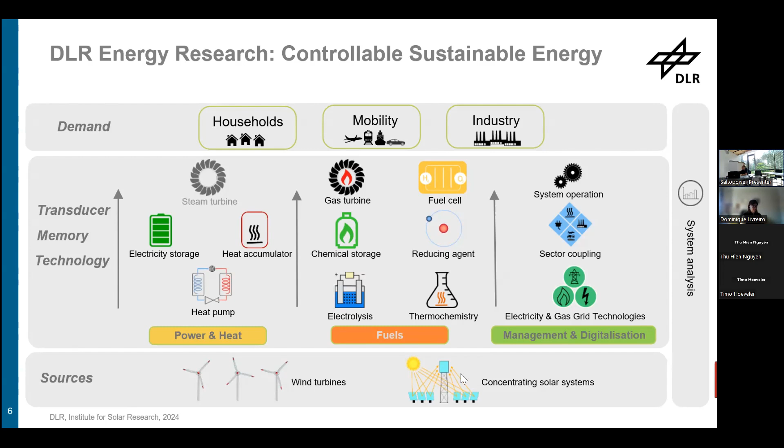Thanks, Dominique. To the demand side, to the use. DLR is working in different institutes on this, and the slides are flipping forward and back.

And the main source, in particular in our institute, Institute of Solar Research, is the sun as energy source. It is the main energy source for the world, even compared to all the other fossil energy sources, and it is one of the cleanest energy sources in the world.

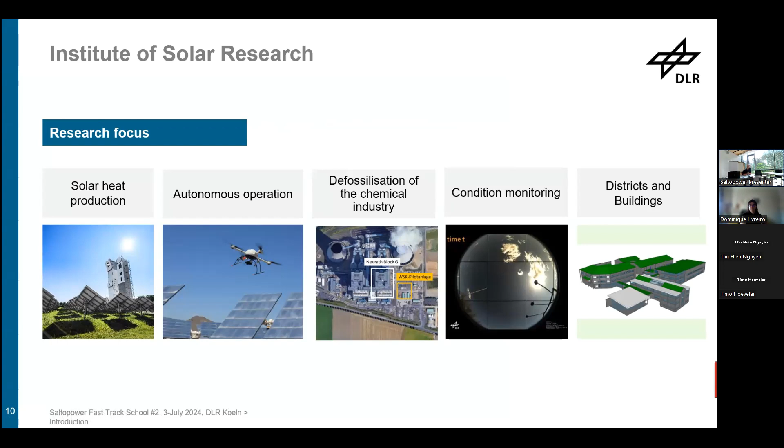I showed this video already in a loop before, so I won't show it again right now. In the Institute of Solar Research, the focus is on solar heat production, on operation, on defossilization of the chemical industry, condition monitoring, and also a group working on districts and buildings.

Although the technology at DLR has been worked on for more than 40 years, the origins go back to the 70s, for the first oil crisis. A specific Institute of Solar Research has been founded in its current form in 2011, with the directors Robert Pitz-Paal and Bernhard Hoffschmidt, you know them.

And we have additional facilities, including the solar tower in Jülich, the large Synlight solar simulator. In 2020, the spin-off of the Institute of Future Fuels, dealing with all the solar chemistry, fuels, and hydrogen. A second tower in Jülich for the many tests we are performing, and a new department, Sustainable System Engineering, with Jana Stengler heading the department.

We are in 5 locations: Cologne here, Jülich with the solar tower, which is only less than 1 hour drive away, Stuttgart on the university campus, Almeria in close collaboration with CIEMAT, Plataforma Solar de Almeria, and since a few years, Oldenburg, with infrastructure for coating and solar cells.

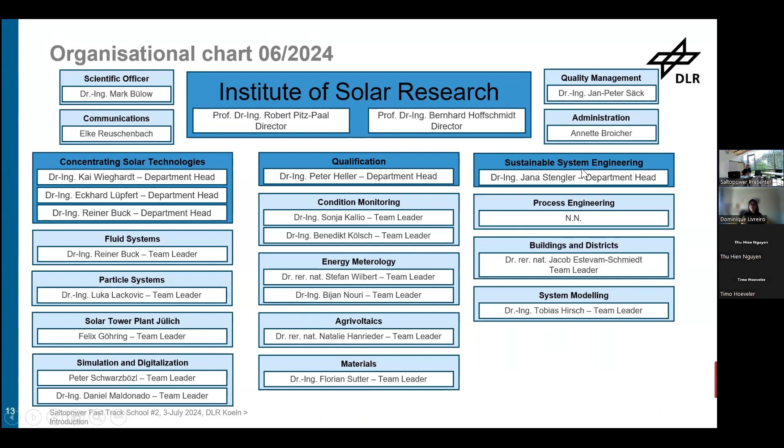Just a short view of the organizational chart, perhaps not so interesting for you. 3 main branches: concentrating solar technologies, qualification, and as I mentioned, the new department with Jana on Sustainability. And on the facilities side, including Reiner, Luka, Daniel. A short view.

Now we already have here the particle system site next to the tower, a heliostat field with more than 2,000 heliostats in Jülich. The molten salt platform in Almeria, operated by Pedro and his team in Evora.

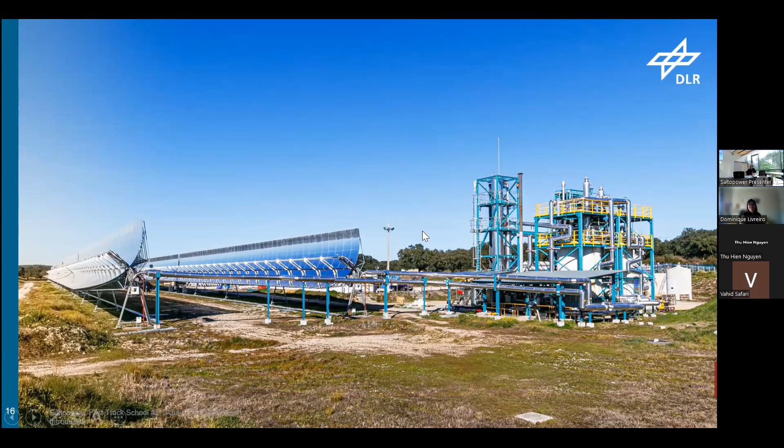What was I saying? Sorry, Evora, I'm still too much Spanish. A nice picture of the same installation in Evora, with the parabolic trough collectors feeding into the molten salt system, and a large facility including several European Union projects, including also the supercritical carbon dioxide turbine coming up. That is now Almeria.

The different solar fields have been operating there since the 1980s. This is still an older picture. We had some spin-offs of the institute. This is also interesting in the context of this project, that could be used as a blueprint in different technologies.

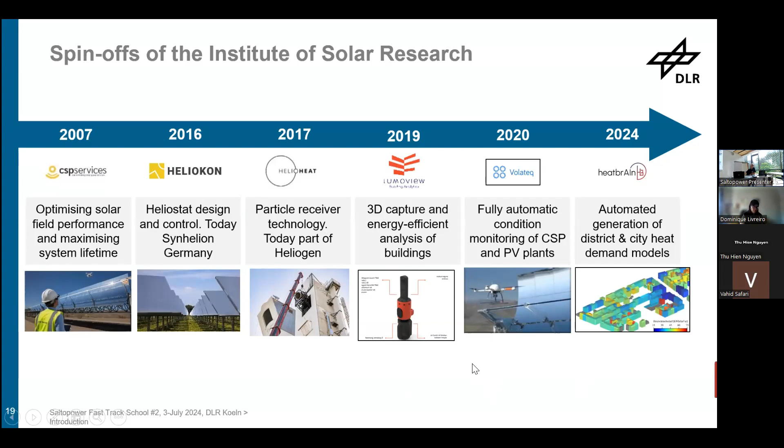The Heliokon is now merged with Synhelion. HelioHeat produced the particle receivers. LumoView and HeatBrain are in the building energy sectors, and Volateq doing the helicopter flights and automatic aviation.

A few slides about engineering thermodynamics, Thomas. Oh yeah, we can come to the front. So my name is Thomas Bauer from the Institute of Engineering Thermodynamics. The institute is located in Stuttgart, but we have also sites in Cologne. I'm also personally sitting here in Cologne, and the sites in Hamburg and Ulm, and also Oldenburg. I think that's missing here.

So the institute focuses on storage development, all sorts of storage, mainly also like electrochemical storage. We see 3 departments, which you can see here: electrolysis, batteries, and fuel cells.

The whole department's purpose is to develop thermal energy storage solutions: solid media solutions with Stefan Zunft, thermal systems with fluids, which is what I'm heading, a department for phase change material with Andrea Gutierrez, and thermochemical storage with different materials. This is in brief our work, and later on we will see some work of the TESIS facility.

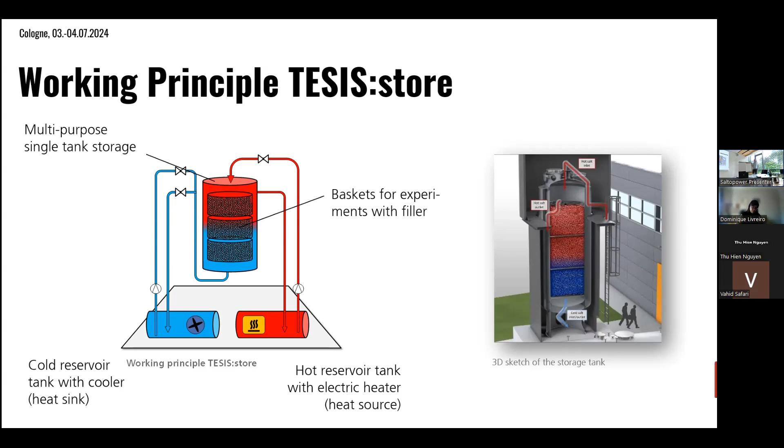To get the filler in and out of the tank, which has a total height of more than 5 meters, we can put the material inside 3 baskets we can stack on top of each other. This allows us to prepare everything outside of the storage tank, and then when everything is ready we put it all inside the tank. It's a matter of a couple of hours and then we are ready to start testing.

Now, what we are looking at is different single tank concepts, starting from the state of the art, the two-tank concept. The first concept we've been testing was the pure thermocline, where you basically put both hot and cold salt together in one tank and have it separated just by density differences.

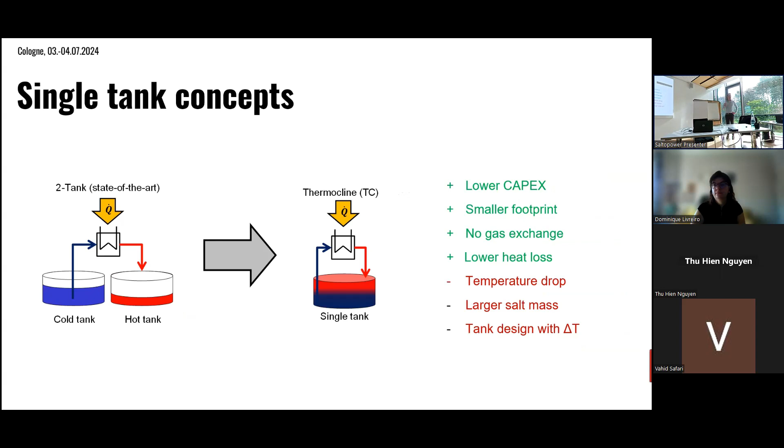But you have a more complex system. The two-tank system has a very constant power output or output temperature. In this case, you have to deal with declining or increasing exit temperatures, and there's a slightly larger salt mass. It also depends on how much you have left in the sump — here you have only one sump, versus two in the two-tank system.

Another aspect is that you're not having a constant tank temperature. You're also dealing with temperature gradients inside the tank walls, which is also a topic that needs to be addressed.

We also have two more advanced single tank concepts. One is the one with the filler material, where you can substitute most of the molten salt with cost-effective filler material. This is a big advantage and has the most potential for cost reductions, but you also have to deal with a larger temperature drop as you have a bigger thermocline in the system, and there are more topics to address.

For example, if you have a packed bed, there's also thermomechanics to care about regarding the movement of the packing, and you need to deal with filler and salt compatibility. Another concept we've been testing is the moving barrier concept, where you have an insulated floating barrier between the hot and cold molten salt. Here the most challenging part is the design of the barrier itself.

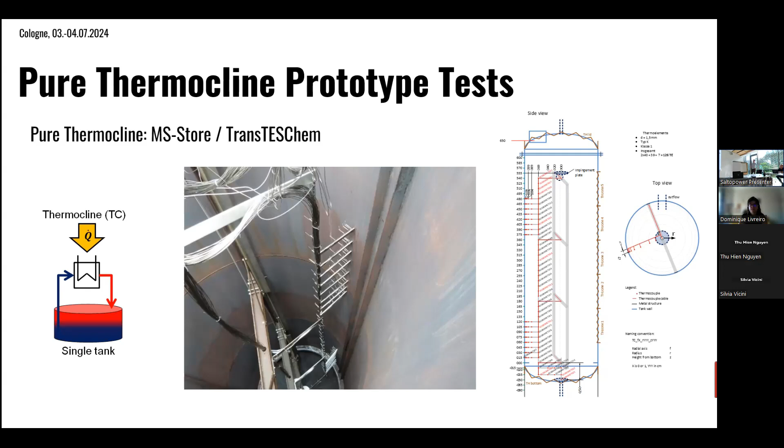So this was some results from the first experiments we did with the initial thermocouple tree. As you can see, there were a lot of thermocouples that apparently failed, but we were still able to measure the thermocline profile inside the tank. You can see there's a very good stratification achievable. This is more than 5 meters in height, and the thermocline thickness itself is way below 1 meter.

So the results we achieved were quite satisfying, and we will also maintain that for several cycles.

This was a more recent investigation, where we then focused on the temperature field in the near wall region, because the question was how stable will the thermocline be in terms of standby periods. Also what we were interested in was the difference between the thermocline profile inside the molten salt and the temperature profile in the tank walls. Because when you do investigation of tank wall stresses and so on, you want to know what kind of temperature to expect, and all we typically know is the temperature field inside the molten salt and how that was linked to each other.

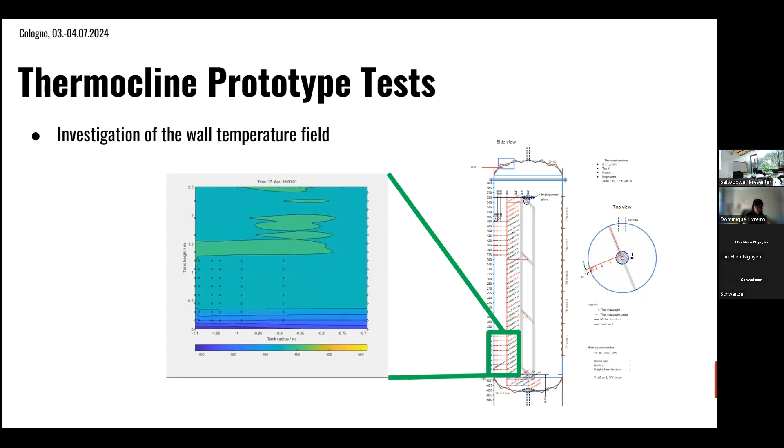And then in a collaboration with the TU Ilmenau, there was a PhD candidate. He was looking deeper into the topic. What he was investigating was small recirculations happening in near wall regions.

And then from these frequency analyses alongside with the model behind that, you can derive some sort of microscopic fluctuations. But we didn't see any large-scale recirculation, which would be something like salt cooling down near the tank walls and then causing huge wakes of flow. So it was only on the micro scale, and in a large scale system it's also less relevant.

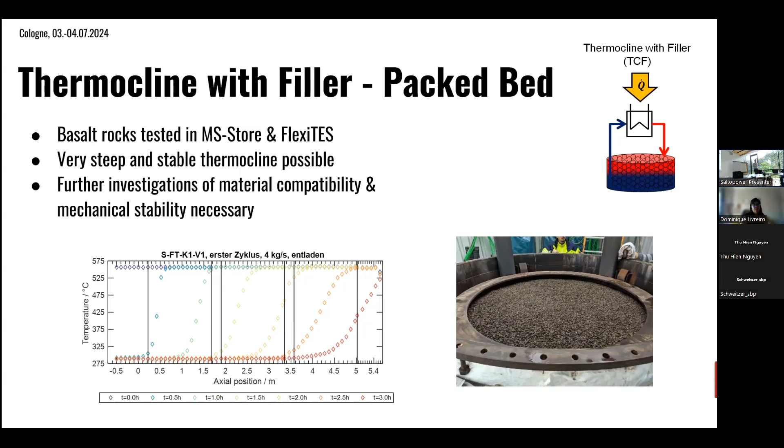Then we had a company who was cutting all the bricks and fitting them in the baskets. Obviously, if you go to a larger scale, you would want much bigger bricks, but in this project we were focusing on something readily available.

Here I also have a nice video of the discharging cycle. That was just the first discharging cycle. If you compare it with the other results, the thermocline is getting a bit wider.

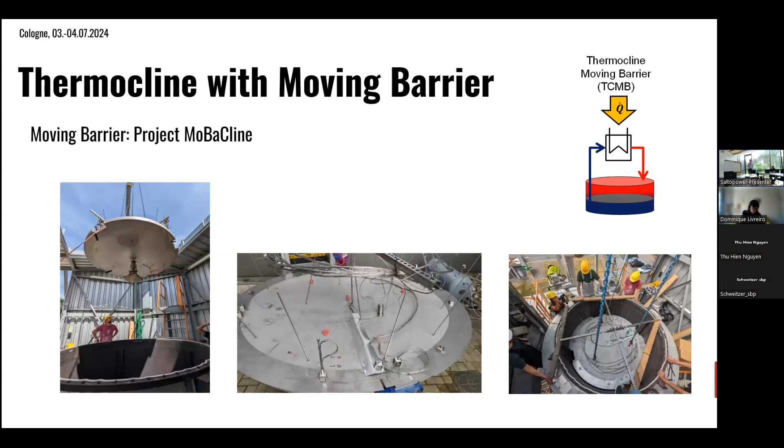Obviously, if you have a thicker barrier with more insulation, there is less heat transfer through the barrier. But interestingly, when you look at the storage efficiency after cycling, we found that you have the highest efficiencies basically with smaller barriers.

The outcome basically was that it's not the heat conductivity, it's the temperature conductivity that is the most important factor here. The temperature conductivity also contains the density of the material, so actually the ability to store heat of the barrier itself.

And so that's why we actually ended up with a thinner barrier. If you think of it from a practical reason, thinner barriers are much easier to design. If it's thin enough, you just need some sort of insulation material inside, and then the steel of the barrier adds enough weight for it to sink in the hot salt, but float atop the cold salt. So the density of the barrier needs to be somewhere between the cold and the hot salt density. Otherwise, if it's too light, it will float atop, and if too heavy, it will sink down.

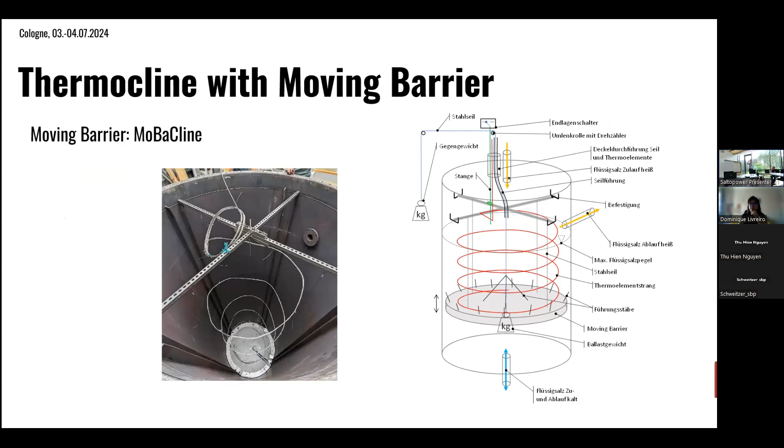So what we did was design the barrier. We had some thermocouples attached, with this spring-like circular concept for the thermocouples so that it can move up and down. We also had some steel rope attached to directly measure its position.

The issue we had here was we evacuated the barrier and then closed it. But when we started operation, we found there was apparently still some sort of residue left inside, maybe water moisture, or maybe even - we did a post analysis in the lab and found some carbon dioxide - so there must have been some reactions going on, and that caused the barrier to somehow blow up.

When we looked inside the tank, we found that it was floating. So we came to the stage where we heated up everything to 400 degrees, and then found out that the barrier was apparently blowing off. The next time we found you have to continuously remove any gas which might form inside the barrier. So you could attach a small flexible hose or something to it, and continuously pump out air of the system. Yeah, so that was my part from the prototype testing.

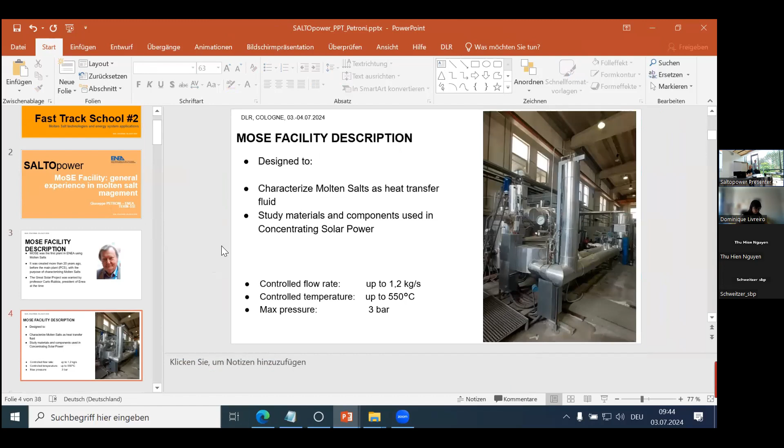So by having small rocks and so on, the thermocline remains quite small. And if you keep the thermocline completely inside the system, it will grow over the cycles and over the days, and at some point you end up with a huge thermocline spreading over the whole system. So you need to get the thermocline out at some point - but that is what I meant with strategies.

So the idea is you could have operated it maybe for a few cycles without extracting the thermocline, without having any temperature drop. Then you need some sort of special operation where you extract the whole thermocline, and then you need to do something with the heat, obviously. But in that case, you would start off with a fresh thermocline again next cycle. So this would be the other option.

And there are some concepts of phase change material at the end, but this adds more effort to this system.

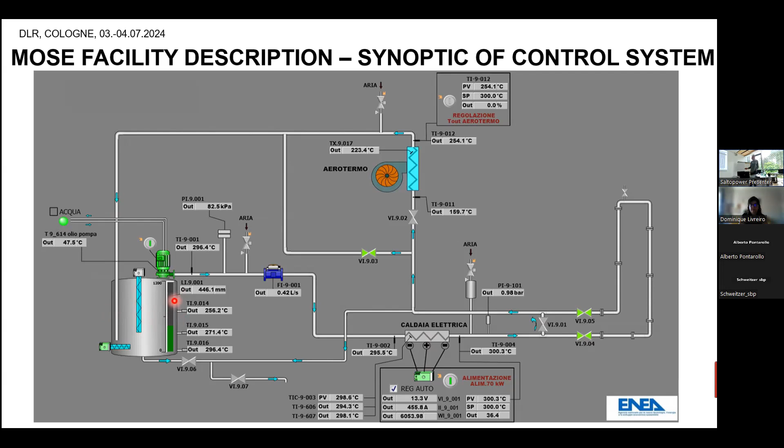This is a scheme of our tank with resistances used to preheat the tank and the salts. This resistance is also used to melt the salt inside.

This is the pump. You can say the pump is below the level of the salts. Here there is another resistance, vertical, because at the beginning we didn't know the best system - whether it's better to have vertical or horizontal resistances.

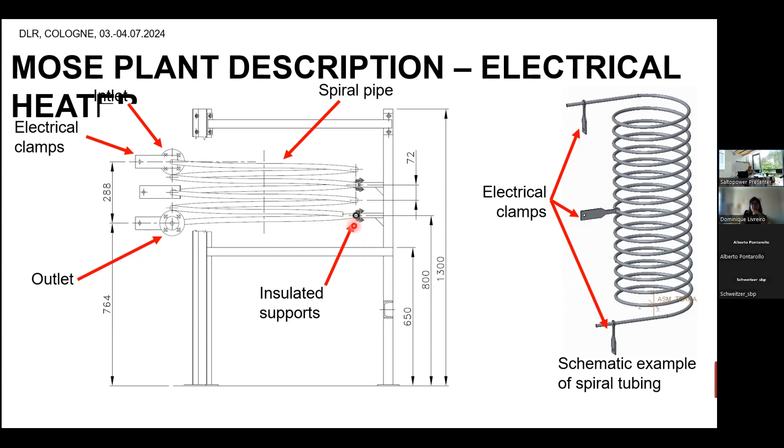This is the design of the electrical heater, a schematic of the component. We use the Joule heating system to preheat the pipe. Here are two electrical clamps, positive pole here, positive pole here, and at the center is the negative pole. We have some insulated supports because Joule heating uses electricity, so we need to insulate this pipe.

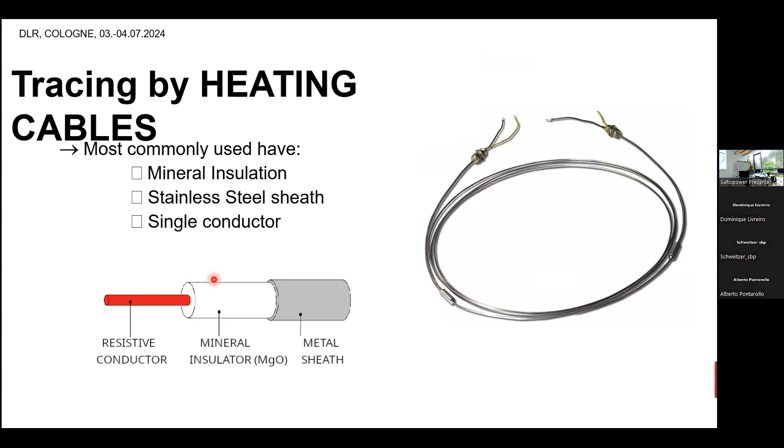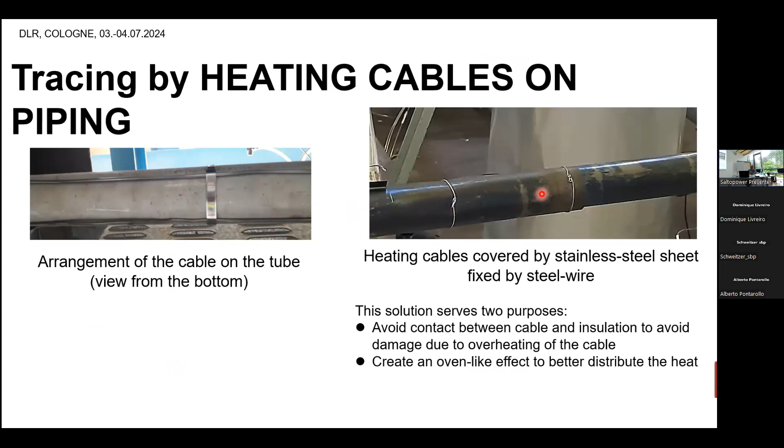Here we can see this part of the cable. Outside, the insulation will be put. So the cable itself is covered with a metal sheet to avoid contact with the insulation. Usually the point where we put the junction is here, between the insulation and the external point. This is a work that is not very good - best practice is here at the junction, but during execution it's not so simple to achieve a perfect result.

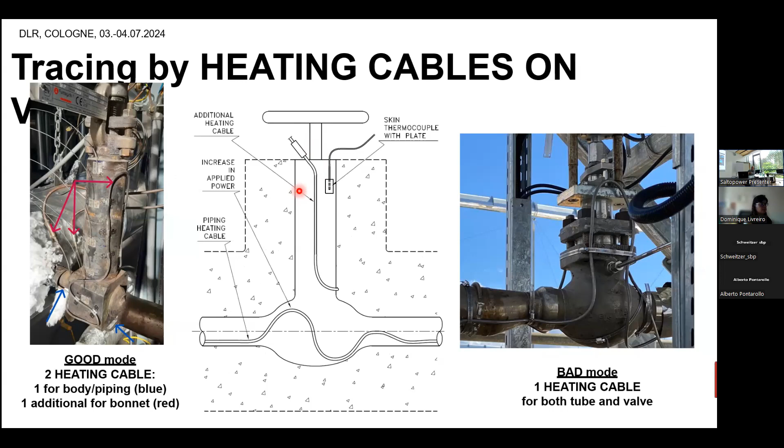This is another arrangement for the vents. In the upper part of the plant, we have to put, of course, a vent. In this case, we have a cable, a unique cable, just one cable, that heats the pipe and the valve, because when we need to open the vent, here there is no circulation of salts, just a circulation of air. So when we need to operate here, we will turn on the cable, and all the parts are heated together. Of course, another thermocouple to control this cable.

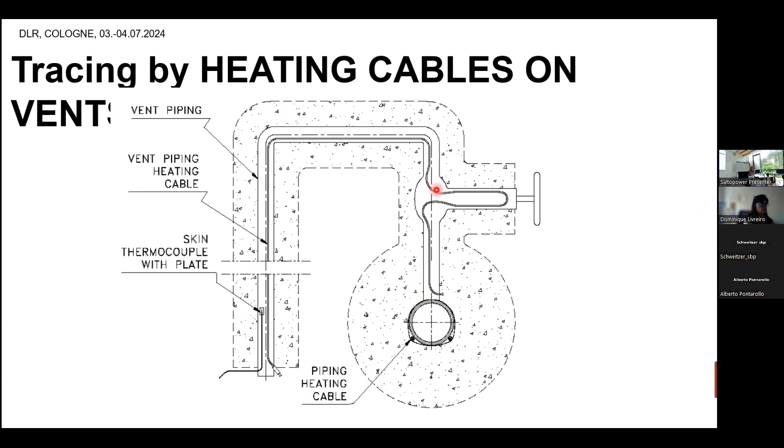This is another case of the pressure sensor. We tested it in the MOSE plant, this is a sensor for the pressure. I will talk about this after these slides. This sensor is arranged in this way: we have a derivation, a valve, and another derivation. Here we will put the sensor. We tested that this sensor worked well. In this case also, we had to heat this derivation. We can use just one cable. And a thermocouple.

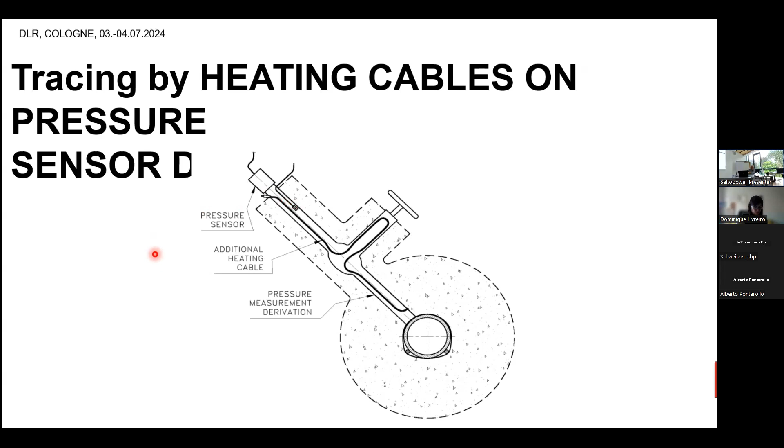We saw some problems with the clamp. This is a correct way to link the cable, electrical cable, with the clamps that are welded on the piping. This is the clamp welded on the pipe. It is a plate to reduce the temperature of the heater of the pipe, of the cable.

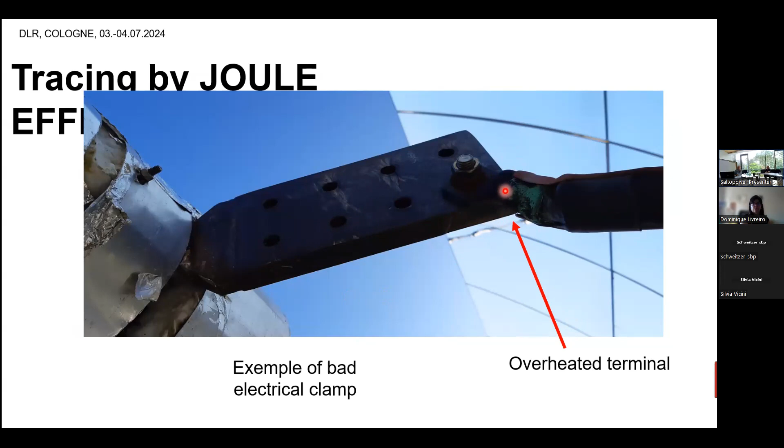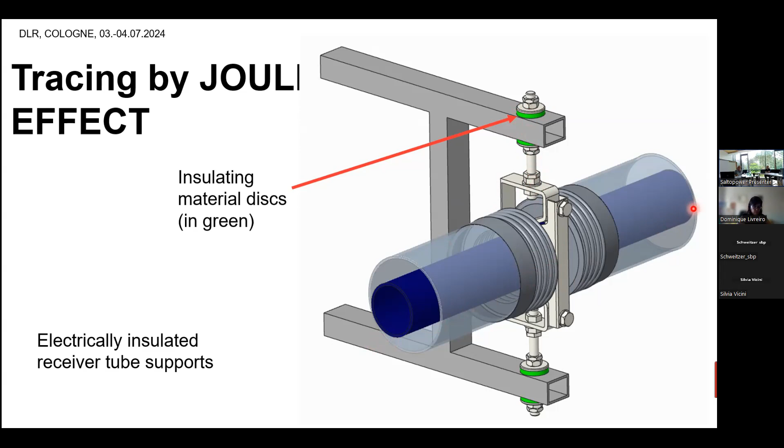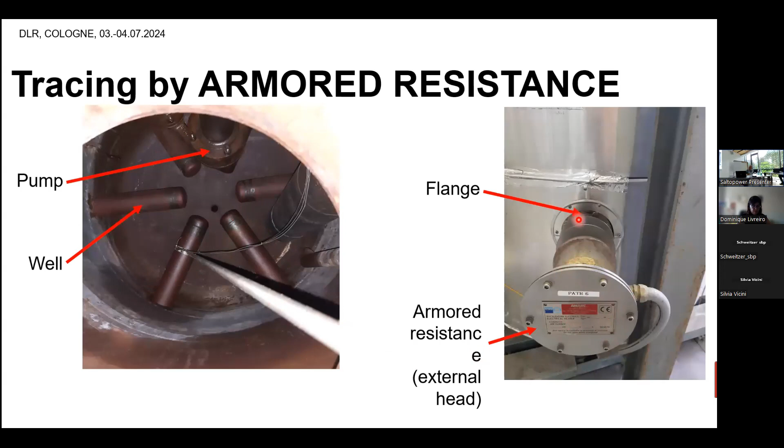This is a photo of the molten salt tank. We have 6 resistances in the lower level. This is a photo of the external part. This is the resistance, and this is the flange where we link the resistance into the tank.

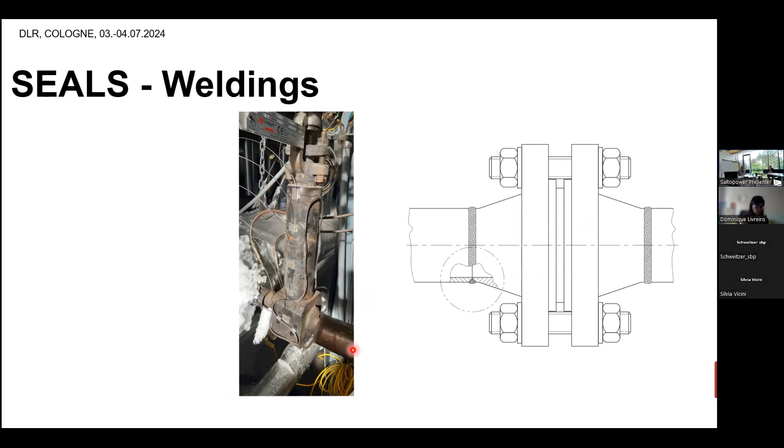Okay, now I'm going to talk about seals. It was a problem at the beginning because salts are very difficult to seal. The best way is to use weldings where possible. In this case, for example, for the valve, welding valves are the best solution to avoid leakage of the salt.

For the gasket, at the beginning we used the flat gasket, flat flanges, but this system didn't work well. After several experiments, we found that the best way is to use ring joint flanges, ring joint something like this. We have a slot where to put this ring joint, and this is the scheme of how the system works.

This system worked very well, but we must be careful during the maintenance operations when the system is opened. The best way is to change the ring joint and carefully clean the slot.

Another system for the seals is this kind of special fitting. This kind of fitting doesn't have gaskets, but there is a metal to metal seal. We have this ferrule, two kinds of ferrule. This is the pipe inside.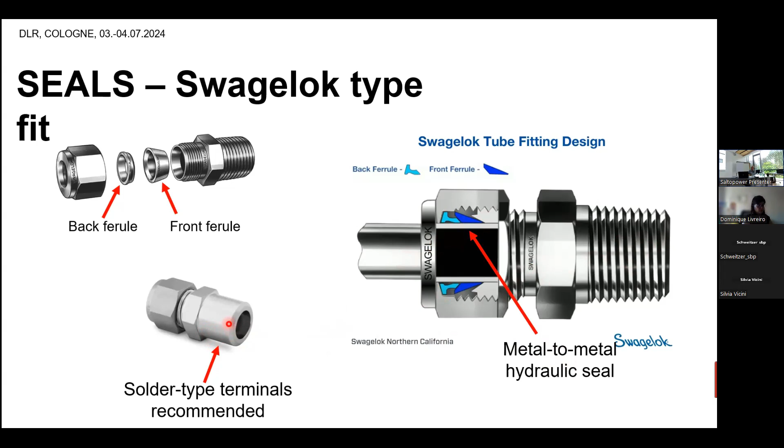Up to which dimension do you use these Swagelok type fittings? Up to which dimension? Small ones. I mean, they are usually small ones. Maximum an inch, okay, yeah.

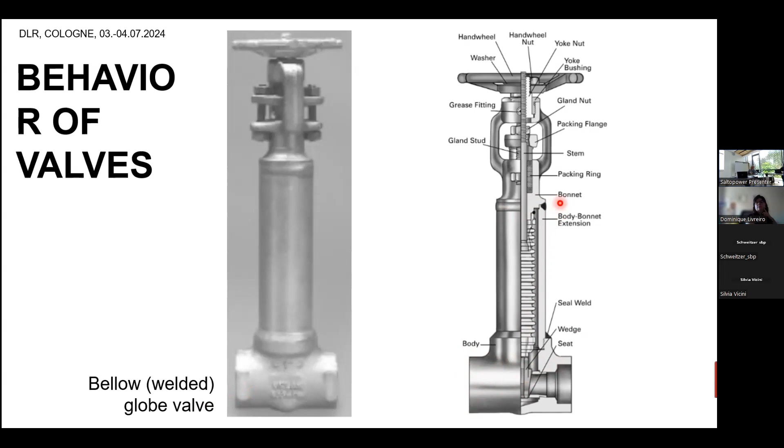Regarding the valves, we found that the best type of valve is this bellow valve. Here we have the bellow. Here we have to weld. And the actuator is a globe. There is a bonnet, here it is welded. And this kind of valve works well on this.

Okay, I finish. Thank you for your attention. I'm at the disposal for any questions, or here is my email, for other questions. Thank you.

Thank you very much, Giuseppe. Okay, questions? No question. Interesting details about your installation, details of heat tracing, welding, sealing. Probably of value for many others. Nobody has a question.

I asked something: Giuseppe, you also use Joule heating in the lab for a small scale installation? I always thought you only used Joule heating for the draft heating, but you also had a small installation of Joule heating for the Mose plant in small scale. Yes, Joule heating. And how long did you operate it, and how was your experience with this Joule heating? Did it work well in Mose, and how long did you use it? We used it for a long time, from the beginning of the plant.

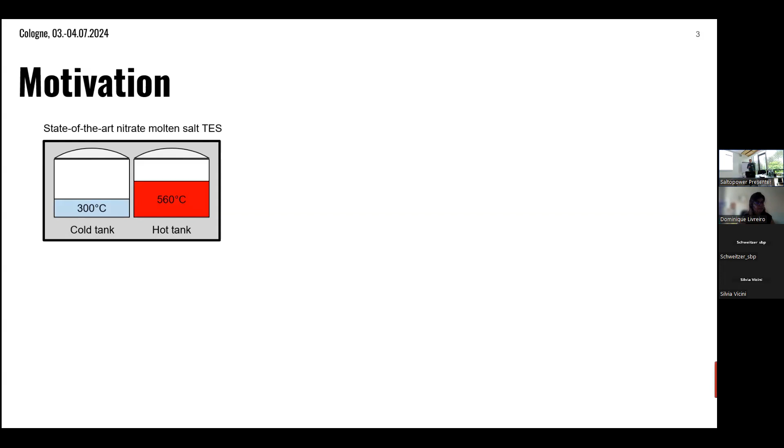As you all know, the state-of-the-art temperature limit for nitrate molten salt storage is 560 degrees. Usually we have a two-tank system, and the idea is to increase the temperature of the hot tank. This way we have several advantages: one is a higher energy density, and the other is that we can achieve higher power cycle efficiency, and this leads to overall lower cost.

Possible new applications are supercritical steam cycles, for example if you want to repurpose coal-fired power plants. Usually they have high steam parameters, and with this advanced 620 degrees technology, now you're able to actually use it as heat storage for these power plants, and also for ammonia crackers as an example.

So the challenges are: first of all, you have corrosion and salt oxidation if you increase the temperature - that's what I will show you in the next slide. The other challenge is that there are actually no commercial components available yet for these high temperatures for nitrate molten salt.

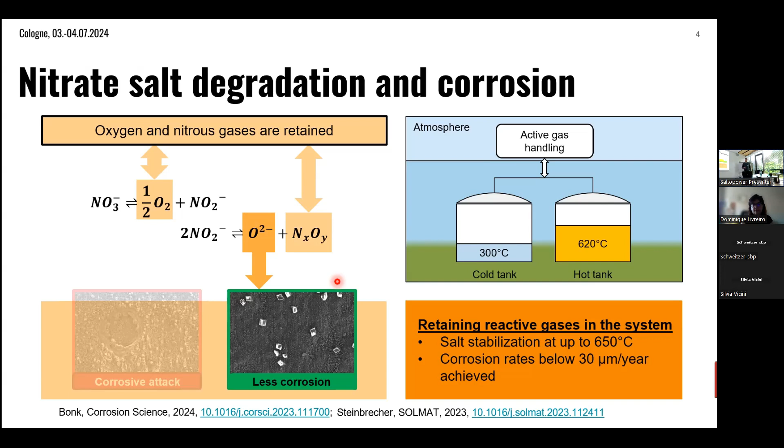In lab scale, it could be demonstrated that salt can be stabilized up to 650 degrees with this method. Also, corrosion rates well below 30 micrometers per year could be achieved. So that's the idea of how we can increase the temperature. Next slide, please.

Now let me talk about component testing. We have a project called Limelisa, and the project goal is to develop and qualify pumps and valves for molten nitrate salt at 620 degrees. This is done at the DLR, and also one objective is to develop these pumps and valves for molten lead, which goes up to 700 degrees, at the KIT.

This project is together with the KIT and KSB as the pump and valve manufacturer. We are in the end phase of this project.

The project started with material selection and material tests in the lab for salt and for lead, and then we did construction of the test loop and also construction of the pump and the valve. The test loops were built at DLR and also at KIT, and the construction of the pumps was done at KSB. We commissioned the DLR test rig for component testing and did the first commissioning tests, which I will show you in the next slides.

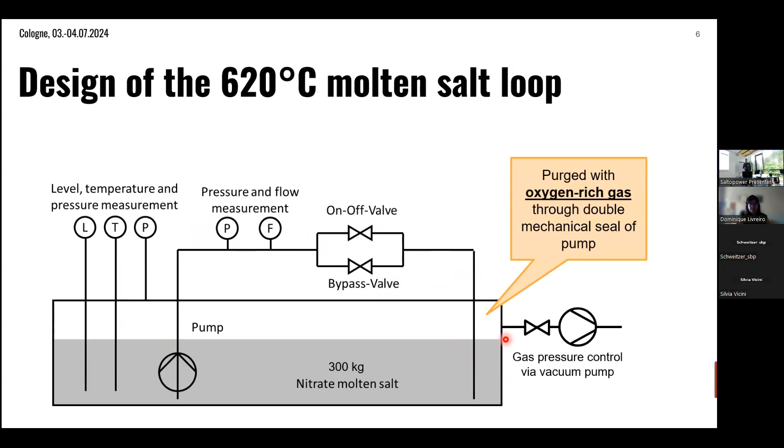Also, we purge this oven with oxygen-rich gas to prevent salt degradation, and this is done through the double mechanical seals of the pump. Also, for a few tests, we need to evacuate the system or reduce the pressure, so we have a vacuum pump which we can actively control with a valve.

So the challenge is that for all the displayed components - the pump, the pressure measurements, the flow measurement, also the valves - there are no commercial components for 620 degrees available that are working well.

The pump has a motor with 18 kilowatts and a frequency converter. It's designed for a nominal flow of 6.7 cubic meters per hour. The nominal speed is 2022 rounds per minute, but it can also go up to 2,900, which we tested already. The design temperature is 630, the operating temperature is 620, and they guarantee a nominal head of 25 meters.

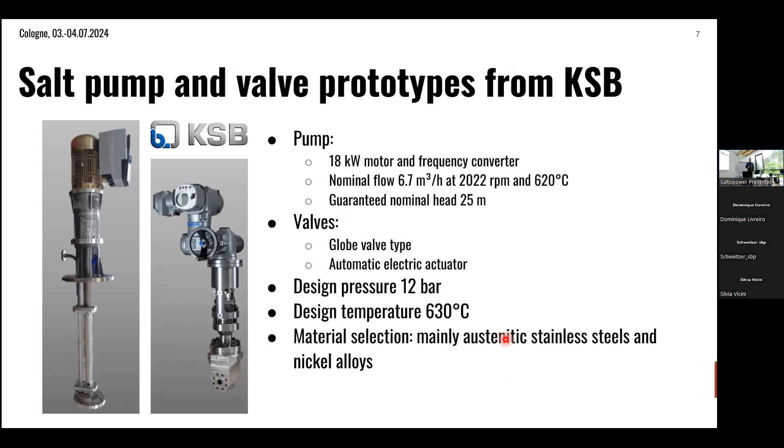The valves are of globe type. They have automatic electric actuators. It is all designed for 12 bars, and the material selection was done before - mainly we use austenitic stainless steel and also nickel alloys, which KSB uses for the prototype. And for the loop, also we use austenitic stainless steel.

So let me talk about the pressure and flow measurement concepts. For the pressure measurement, state-of-the-art pressure measurements use either diaphragm seals with a thermal oil that goes up to 400 degrees, and we also saw these Gaffron sensors in the last presentation - they go up to at least 600 degrees, and they have a liquid metal filling.

What filling? Liquid metal. Yeah, it's sodium, potassium.

We use a slightly different approach, although we also have these Gaffron sensors installed. We rely on the high accuracy of conventional pressure sensors that are just shielded from the high temperature with a controlled gas cushion. That's our approach for the pressure measurements.

For the flow measurements, usually at these high temperatures, ultrasonic flow meters are suitable, but they are not available for our DN25 piping. So we used an orifice plate meter run with a differential pressure measurement, and also here we used a controlled gas cushion to shield from the high temperatures of 620 degrees.

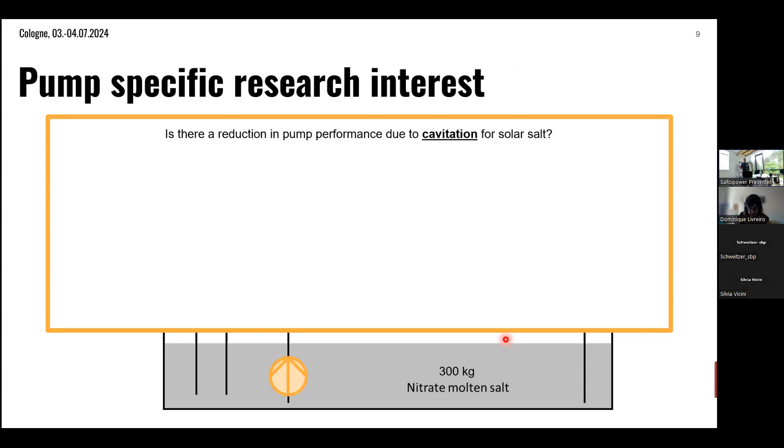Cavitation occurs mainly for water pumps if the pressure before the pump is too low. And the question that we have is: is there cavitation for molten salt? From the scientist's point of view, we might say okay, the vapor pressure of the molten salt is actually quite low, so we would not expect much of a problem with cavitation. But we also hear from pump operators that they experience a drop in performance when they reduce the pressure under certain flow conditions, and they assume that this is due to cavitation.

So to answer this question, we did some tests. Here's the methodology for the planned experiments. First, we have a validation of the flow meter and the entire test loop with water. Also, the pump was tested before it was shipped to the DLR with water. We then did the pump characteristic curves with molten salt at 620 degrees at the DLR, and also the cavitation experiments for molten salt. That's what I will talk about now.

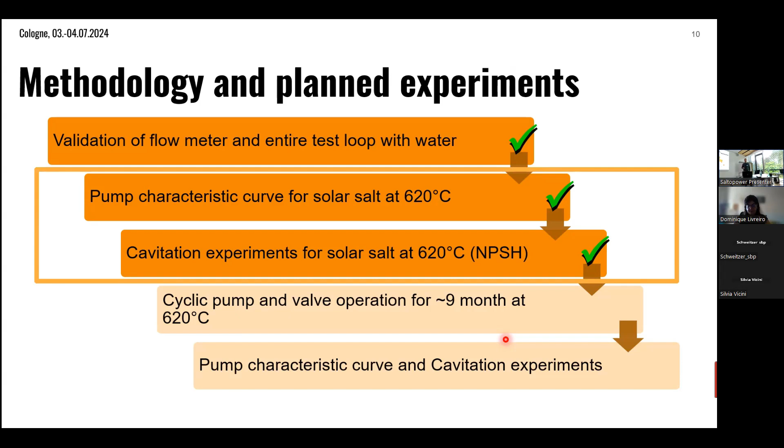After this, there will follow a period of 6 to 9 months of cyclic pump and valve operation up to 620 degrees. Again, to see if there are changes in the characteristic curves, we'll do the cavitation experiments again.

So in this slide, you see how the loop looks like. This is the motor, we have the pump underneath, we have these actuators for the valves, which are here.

The insulated pipe work is here. In this part, there's the meter run, the orifice plate meter run, and underneath there is the oven.

So this picture shows actually the operation at 620 degrees. That's the thermal image.

Okay, so the first result I show you is the pump characteristic curve for water and for molten salt at 620 degrees. And we see from the slides or from the diagrams that the pump characteristic curve is similar for molten salt as for water.

The difference might be explained due to differences in the viscosity and also the density. The same applies for the efficiency. So for the molten salt, we have a slightly higher efficiency than what we measured, or KSB measured, with water. And it might also be that there are some measurement inaccuracies, but this is probably not the biggest factor.

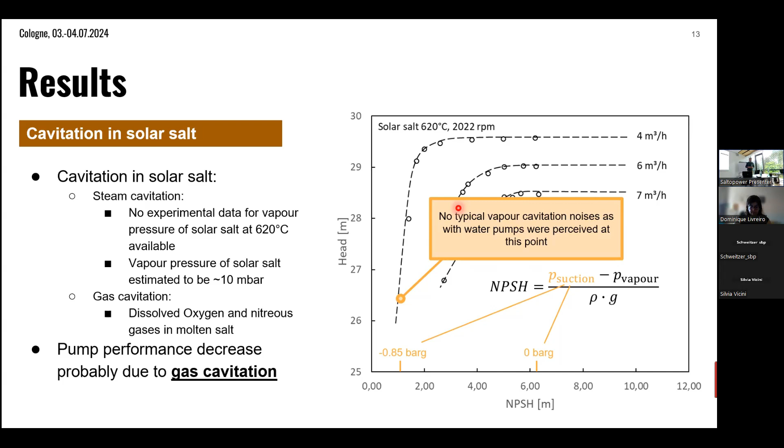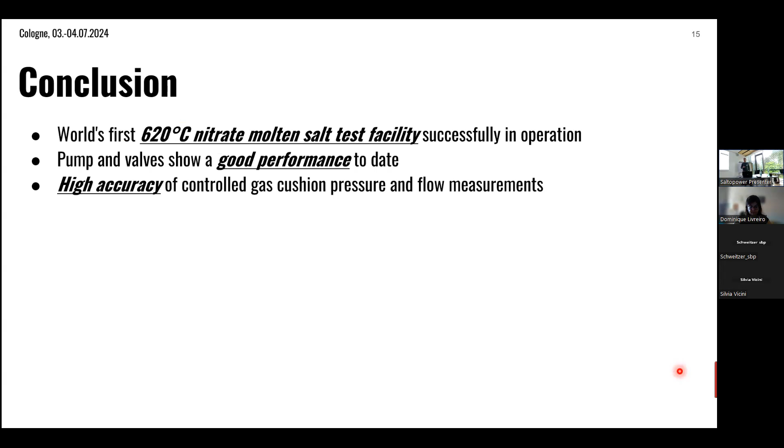So we successfully operated the first 620 degrees nitrate salt test facility. Also, the pump and valve show good performance to date. We demonstrated a high accuracy of the controlled gas cushion pressure and flow measurements. And last but not least, the scientist and the pump operator might now actually come to the same conclusion that although we observe a performance decrease due to gas cavitation, it is most probably not harmful to our equipment.

So thank you very much for your attention.

Dankeschön, thank you.

Questions? Johannes: Are there any advantages in using oxygen-rich gas instead of nitrogen gas as here?

In the beginning I showed a slide where this is actually necessary for stopping the degradation of the salt. The degradation reaction forms oxygen, and in a large system, if this oxygen is always extracted from the system, the degradation goes on and on. If you now stop this oxygen from going out and increase the oxygen content in the system, you will also stop the degradation. That's the reason why we use this approach.

Maybe I can add one comment, because there's always a lot of confusion with the gases, because it depends on the salt. That's true for solar salt. But if you work, for example, with a salt which contains a lot of nitrite, you don't want maybe to have the oxygen, because oxygen will go into the salt and change it. So it depends on the salt, but for solar salt it's beneficial — yes, it's beneficial to have oxygen to stabilize the salt.

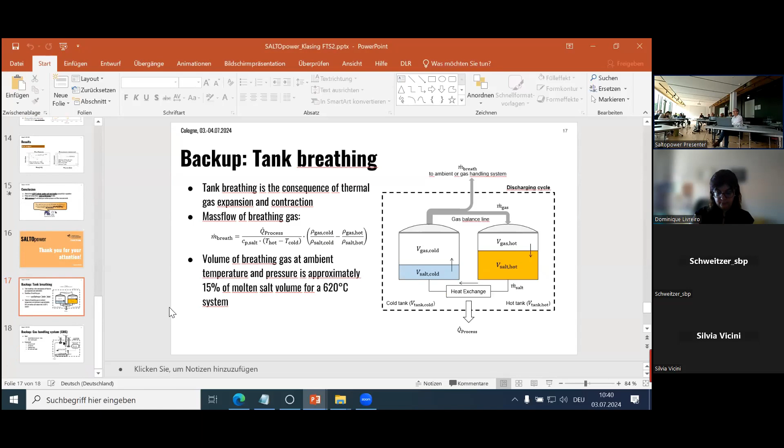Thank you, Freek. Veronica here. I want to ask if you follow the salt degradation or maybe corrosion at some point. I understand that this is not the main purpose of the setup, but maybe you follow these aspects nonetheless, because 620 is not so state of the art.

Thanks, Veronica. So actually we do take samples on a regular basis from the oven. So far we just started our experiment, so we haven't analyzed the samples yet, but we will start soon. The operation time so far was a couple of hundred hours, or maybe below 100 hours at 620 degrees. So we don't expect that much degradation yet, but we will monitor it through salt sampling.

We also analyze the gas atmosphere to see if there are high contents of nitrous gases coming out. For the corrosion, KSB wants to post-analyze all the components. They will maybe also cut the pump or the impeller and then see if there's corrosion inside the impeller and also the bearings. That's the interest from KSB.

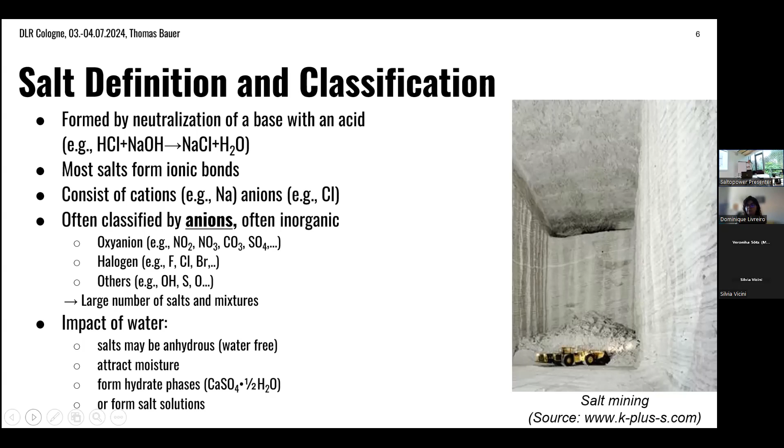Also, the salt can react with a lot of things, so the salt chemistry is very important. Salt dissolves a lot of things, and that's of course also the problem of corrosion that always needs to be addressed with salt.

I talked already about the vapor pressure - it's typically very low, but for some salts, like halogen salts, it can be a limiting factor if the vapor pressure gets too high, and then you can't use it properly anymore. The viscosity is low - for example, nitrate salt has a viscosity like water at 560 degrees. The heat capacity, especially per volume, is high because the density is typically double that of water.

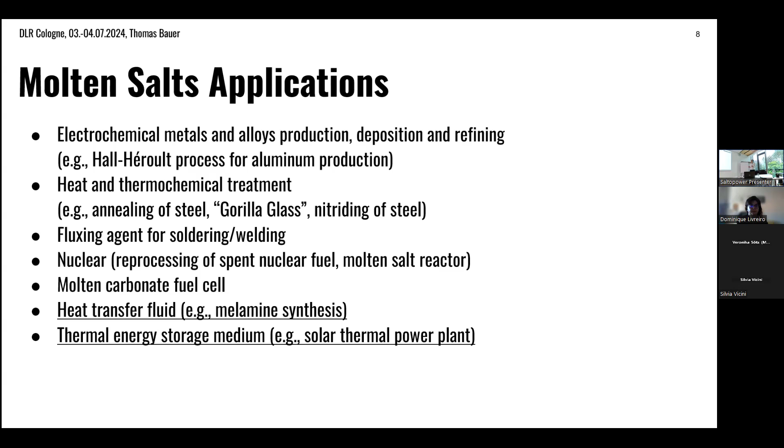And then we have thermal energy storage in CSP plants with nitrates. So I come now to the thermophysical and physicochemical properties of molten salt.

I have two slides with a list of the most important properties. We have the heat capacity, and I always show the temperature dependency, the measurement method, and why it's relevant.

The heat capacity is either constant with temperature or it increases. If you see someone reporting heat capacity values with decreasing values, these are wrong, because it's physically not possible. This is important, especially for the storage capacity.

Then we have density. We typically see a linear decrease of the density, which means the salt expands once you heat it up. And then we have properties like thermal conductivity, which can be positive or negative with temperature. Thermal diffusivity, we heard this before from Christian, can be important for transient heat transfer phenomena like the moving barrier.

And then we have the viscosity with a very strong dependency: high viscosity near the melting point, and then it drops. The typical correlation is this one.

If we melt the salt, the volume change on melting is an important property, and the melting enthalpy may be important for phase change materials, but that's not a topic here. If you initially do the melting, you need to consider this. I will explain later the difference between solidus and liquidus. If I show a phase diagram, there's not only a melting point—there can be two points which are relevant.

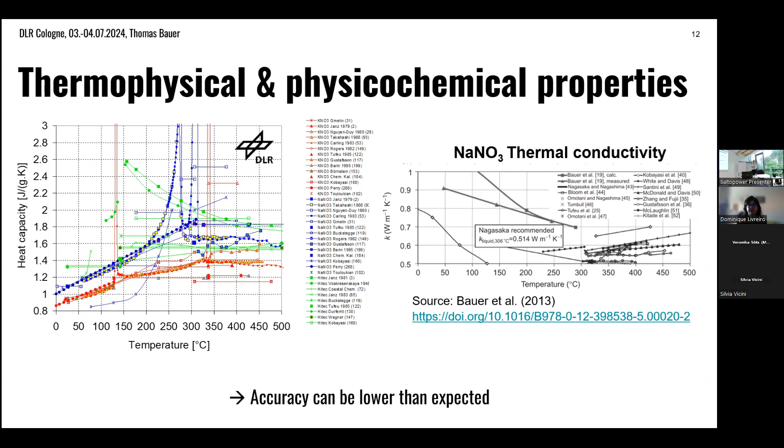Of course, measuring a lot and averaging a lot will help improve the accuracy, but maybe sometimes there are also systematic problems. I would say for the common mixtures, they are known—it's rather for new mixtures where you have difficulties finding it.

Then about the salt mixture: the first question is why we mix salt at all. The answer is simple—the single salt has a melting temperature, for example in this very famous phase diagram, of about 300 degrees, and if we mix it, we get a eutectic point at 220 degrees. This means we can extend our operation window. That's the main motivation of mixing salt instead of using a single salt.

The difference here for solar salt is that we don't use a eutectic mixture, but a non-eutectic mixture, which means in the phase diagram we move to the left and add more sodium nitrate. Then we have one point called solidus, where the salt starts to melt, and it has a mushy zone where it's liquid and solid, and then we have a fully liquid salt from about 250 degrees. So that's the difference between liquidus and solidus at this point.

Why did they add sodium nitrate? The answer is that the heat capacity is higher with sodium nitrate, and the costs are lower. So that's in the end the optimization and compromise between the melting point and the other properties.

If we add another salt to the system—sodium nitrate, potassium nitrate, for example calcium or lithium—we can lower the temperature to around 130 or 140 degrees and achieve lower melting points. But then we have to look at other topics, like calcium nitrate being hygroscopic, or lithium nitrate being expensive. You find information on this mixture and what is really the exact mixture—it's also sometimes a discrepancy in literature what the exact mixture really is.

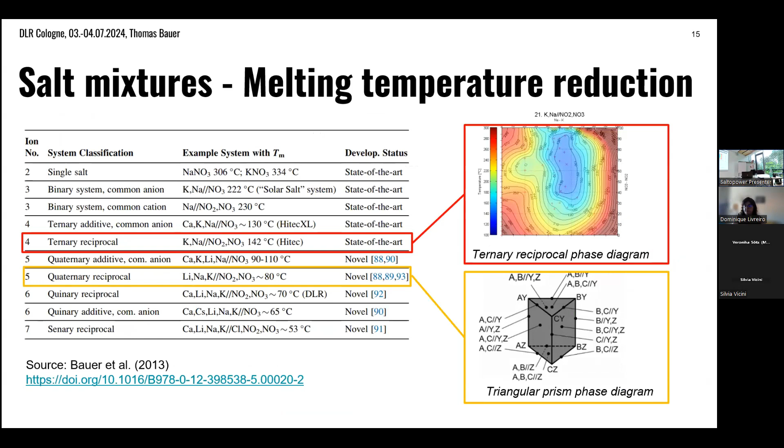So I would say these are the main low temperature molten salt nitrate mixtures relevant for practical application. This is a mixture with lithium nitrate, sodium nitrate, and calcium nitrate. The melting temperature is always very similar, and you can see there are always advantages and disadvantages. The ideal candidate, lithium nitrate, is very expensive.

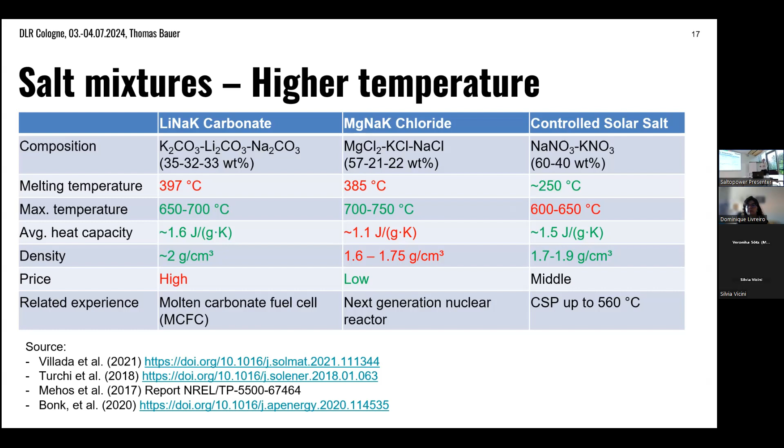Thomas Bauer, can you hear me? You cannot be heard by the audience. No. Interrupted voice since one minute. No. No, we hear you with lots of cuts. No, it's still the same. I think it's the microphone. If you can hear me loud and clear, then it's probably related to your microphone.

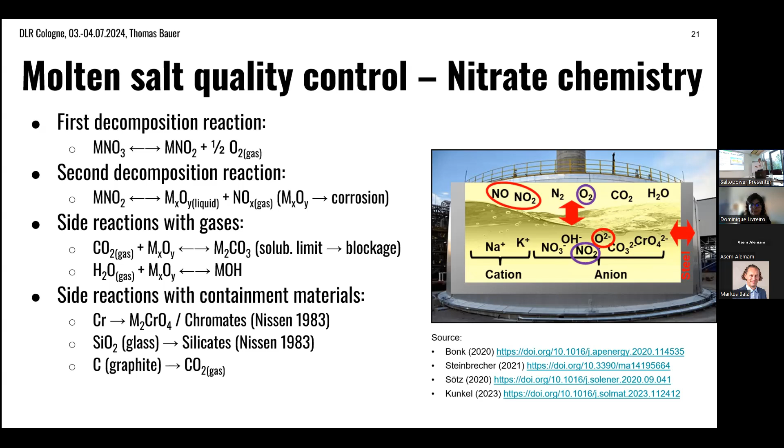And then we have things also that chromium, for example, from the steel is dissolved in the salt. Glass will also react, we know this from filler materials. Often they contain some silicates or silicon oxide phases, and they typically react with the salt. Also in the beginning, people used graphite seals. That's also not a good idea because graphite will react at 350, 400 degrees to form CO2, and then your seal is basically gone.

So we saw this idea from Frerk before. If you want to stabilize the salt, we think it's a good idea to close the atmosphere, to not release oxygen and nitrogen oxides, but rather keep them in the system. In this way, you can stabilize the salt. This has been also published, and it has been demonstrated in the lab, not in large scale so far. The largest scale experiment is the one Frerk showed up to now. I think there's no other experiment with solar salt at this high temperature yet.

Then some words about the compatibility with solids. Of course, there's corrosion, there are metals, and we need to look at the corrosion. I only show here now the corrosion with solar salt. For solar salt, we work with different alloys. We can work with low alloyed carbon steel up to 400, 450, maybe 480 degrees. Then we have some chromium alloys, and stainless steel is the main alloy up to 560 degrees.

There are different types with different stabilizing elements like molybdenum, niobium, or titanium. Typically also there is carbon enrichment at high temperatures. And then if we have very severe applications with high heat fluxes and so on at receivers, at molten salt heaters, where we have even higher temperature, then sometimes also nickel-based alloys are used in limited applications.

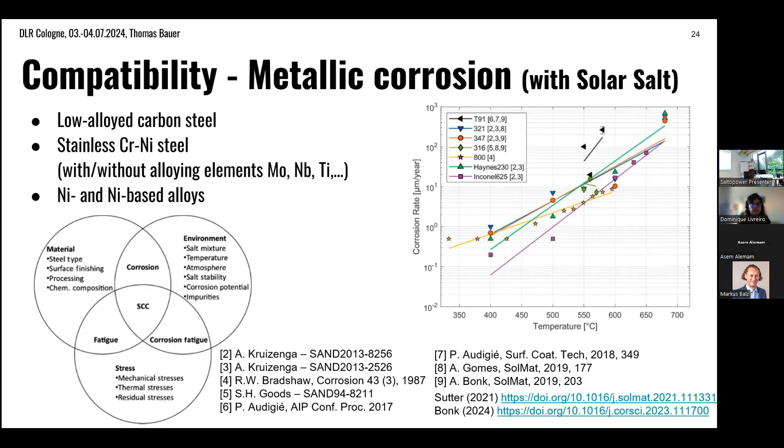Then we also heard from Christian that we can have molten salt in contact with filler materials. So the potential filler materials of interest for nitrate salts are natural stone. We work with, for example, volcanic rock, basalt. Also of interest are technical waste products like slag, for example, from steel manufacturing. The difficulty here is a bit that in the slag you find a lot of elements inside. And as I said, the salt will react with quite a lot of things. So the question is always, is the compatibility really ensured and so on.

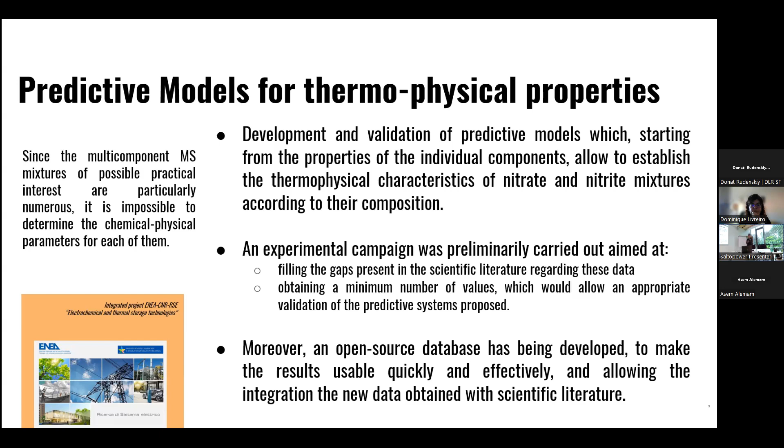We decided to start from a list of binary and ternary salts, because these are the most commonly used. We characterized them regarding their heat capacity, viscosity, and density. All the experimental campaigns and the mixtures were studied in the temperature range from values very close to the solidification temperature up to the maximum values for their thermal stability.

Since this is a lesson, I will report very quickly how we measure the properties and the approach used to model the behavior. I report all the references at the end of the presentation, so if you are interested, you can follow our work. So, for the specific heat, as you know, we measure it with a differential scanning calorimeter.

It is possible to estimate the heat capacity of an unknown molten salt using a known heat capacity system, and we use high purity sapphire as a reference. Here we reported the results as an average value of many measurements—more than 25 repetitions for each mixture. I also reported the experimental error, because as Thomas said, it's not so easy to determine these characteristics with an exact value.

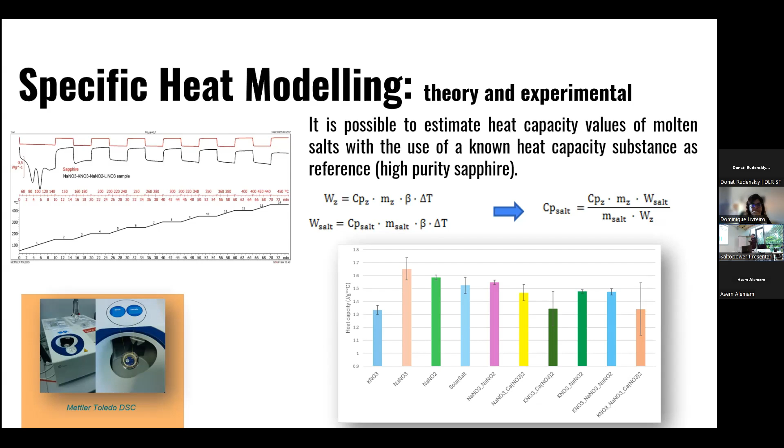So we tried modeling to predict the heat capacity of a mixture, starting from the values of the pure salts that we determined before, using an additivity rule based on the molar contribution of individual components.

So the specific heat of a multi-component mixture can be derived from these equations. Here I reported the results comparing the experimental values, the literature data, and our modeling approach.

Moreover, we decided to also model some unknown mixtures that we did not measure, thinking of the same rules. So I reported again some experimental data, literature data, and our modeling, and as you can see, the deviation between the model data and the literature values is about 5%. So we can state that this approach can be very useful to determine the heat capacity of an unknown multi-component mixture without doing a lot of experimental validations.

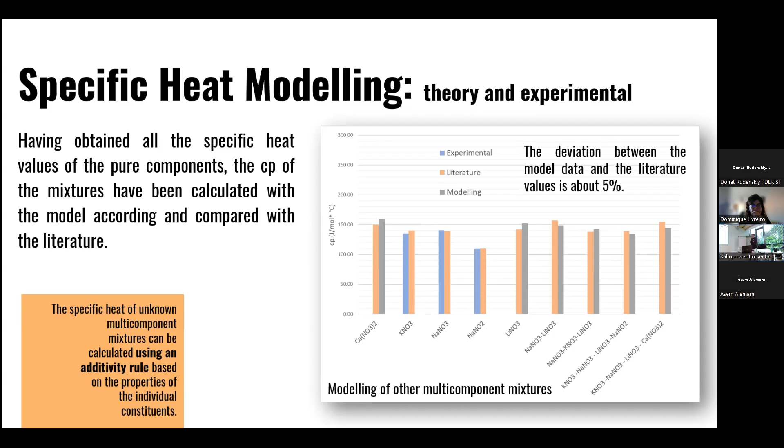And the temperature is regulated by a controller, and the salt during the test is stirred to be homogenized. And a steel cylinder connected to the dynamometer is immersed, so the weight loss due to the buoyancy effect is recorded.

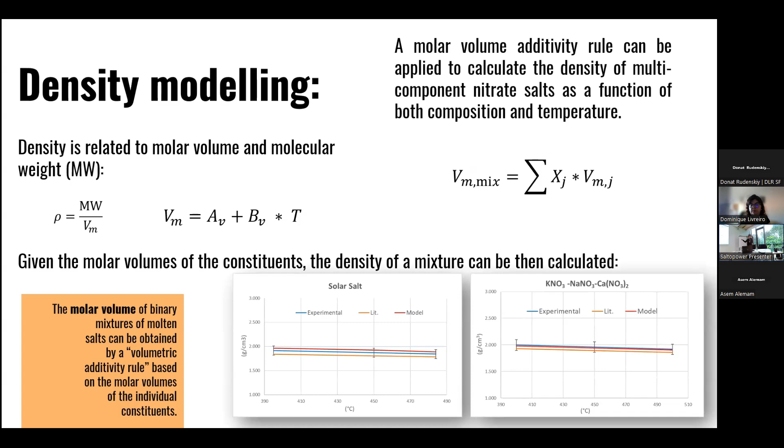And I reported only some results that we obtained for all the mixtures that we measured. As you can see, the experimental data, that is the blue line, compared to the literature data and the modeling, is quite accurate within the experimental error. So we decided that it was a good approach.

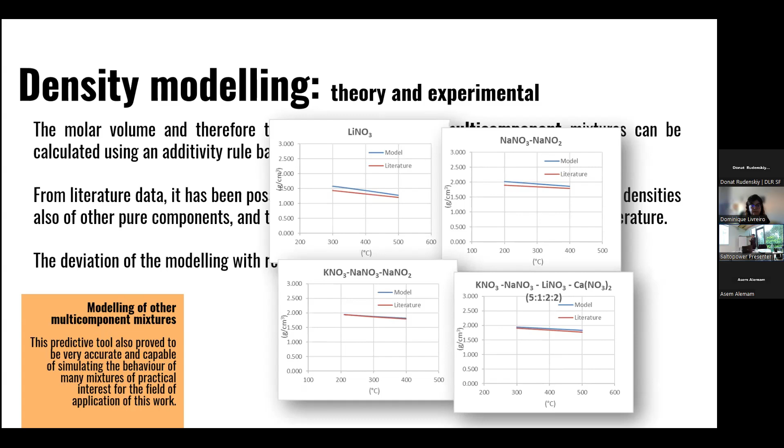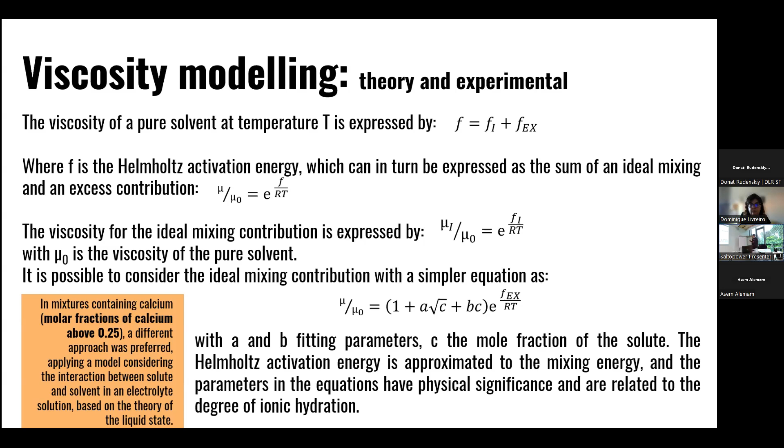We decided that it could be a good approach also because these parameters in the equation have a physical significance and are related to the degree of ionic hydration. I show you the results for this mixture containing calcium, and the results are more accurate than before. We stated that they are satisfactory only for calcium nitrate fraction higher than 0.25, and we are still investigating more in detail what happened with the calcium.

A few words regarding thermal conductivity modeling. We have a hot wire system in our lab, but for now we can only perform experiments at room temperature. So we decided only to study what could be a good approach to model this property.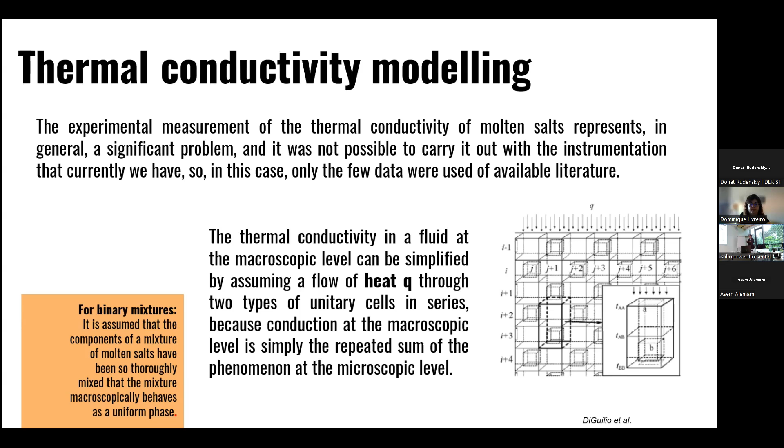We stated that for binary mixtures, we can assume that the components are mixed in a way that the mixture can macroscopically behave as a uniform phase. So the thermal conductivity in a fluid at a macroscopic level can be simplified assuming a flow through two types of unitary cells in series, and this phenomenon can be repeated as the sum of all the microscopic levels.

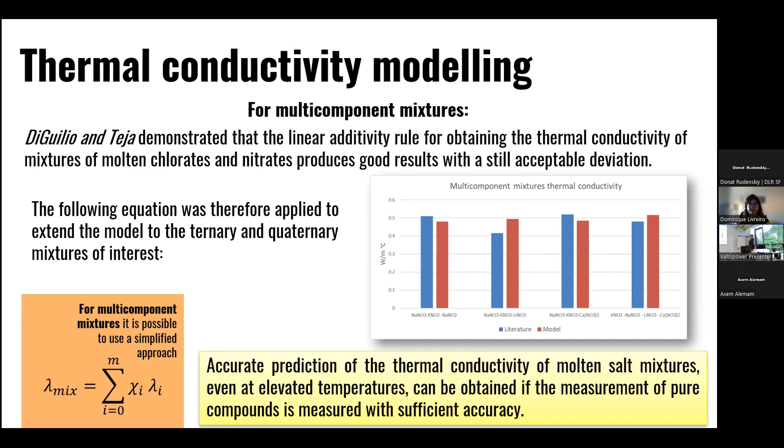For multi-component mixtures, the approach is quite simple because we can use, as before, this formula that is the sum of the molar composition and the thermal conductivity of the individual components. Here we reported the comparison between the literature and our modeling data for these other multi-component mixtures.

When we finished this first part of the work, we decided that it should be improved, considering also the data for thermal stability and corrosion and compatibility with other materials. That could be very useful to insert also these properties in our database. Even if our first approach of this experimental and modeling campaign was good because it came to complete missing data and to identify innovative formulations of mixtures that could be used as thermal energy storage or heat transfer fluid without measuring them, we decided that we need also other data regarding these two important topics.

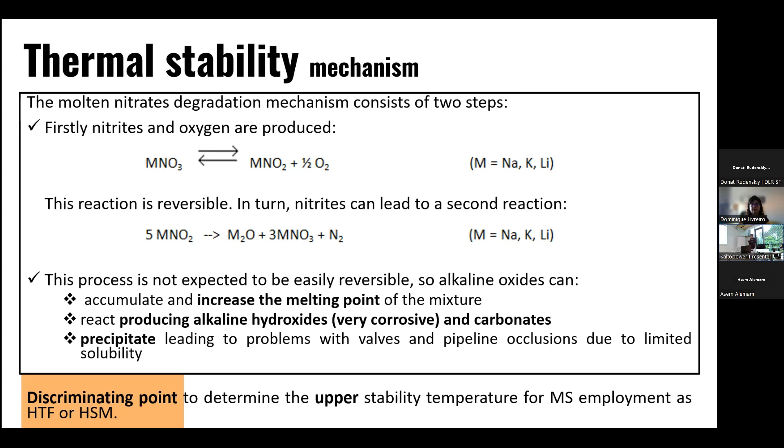So the discriminating point to determine the upper stability of a mixture is, of course, the thermal stability point. We set up this salt heating system in our lab. It consists of a stainless steel reactor characterized by two concentric cylinders - the internal one is in stainless steel, and it is where the salt is placed. The external one is in refractory material and contains the heating systems.

During each test, we inserted the salt in the setup, and the salt was heated up to 3 isotherm values and kept at these 3 temperatures for 48 hours in air. During each isothermal step, we sampled the salt 5 times to analyze it during the time and according to the temperature. After each isothermal test, a few grams were sampled, and we investigated by ion chromatography the presence of nitrites, and by acid-base titration the presence of oxides.

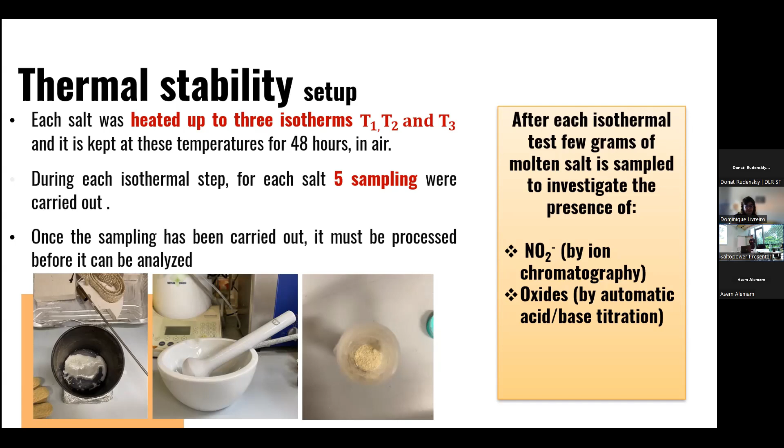We are now working on this because these experimental campaigns in the lab are very difficult to carry out. We have a lack of long-term experimental values, but these data are very useful for comparison. We can state some correlation between salt instability and volatility, and we can state which components can have a stabilizing effect, for example sodium nitrate and potassium nitrate, or a non-stabilizing effect, for example sodium nitrite, lithium nitrate, and so on. We are not yet able to predict the behavior of a mixture based on individual components, but we are now studying some group contribution methods to set up modeling systems.

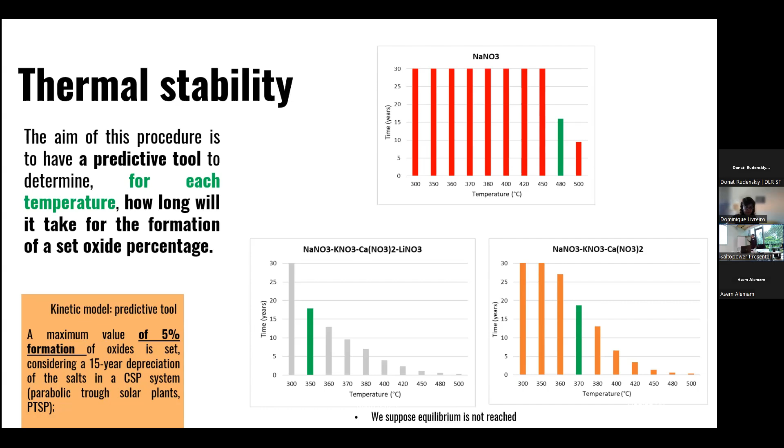Just as a comparison, we did some calculations to have a predictive tool to determine, for each temperature, how long it will take for the formation of a set oxide percentage. Here I reported maximum values of 5% formation of oxides, considering a 15-year depreciation of a CSP system. As you can see, there is a comparison between sodium nitrate, a quaternary mixture containing calcium and lithium, and a ternary mixture containing calcium. The green line represents the temperature at which you have to use the salt to avoid reaching the maximum formation of oxide in 15 years. It's quite different in the three scenarios.

So just to conclude our study regarding thermal stability, which is still ongoing: sodium nitrate is of course the component that is most largely used. We can state that the ternary mixture containing calcium, the Hitec XL mixture, can be used in a temperature range of 240 to 420 degrees. Quaternary mixtures containing calcium nitrate have the advantage of being low melting, but are recommended to be used only in a range of 300 to 350 degrees. Quaternary mixtures containing sodium nitrite do not find application in CSP plants because they suffer huge degradation mechanisms.

So just a few words regarding compatibility tests. We performed some static compatibility tests at lab scale. Here I want to show you some highlights of our work. We decided to choose some representative steels that are the components mostly used in CSP plants: 2 austenitic steels, 1 ferritic steel, and 1 carbon steel. First of all, we decided to perform static tests, inserting the salt in the setup you see in the picture.

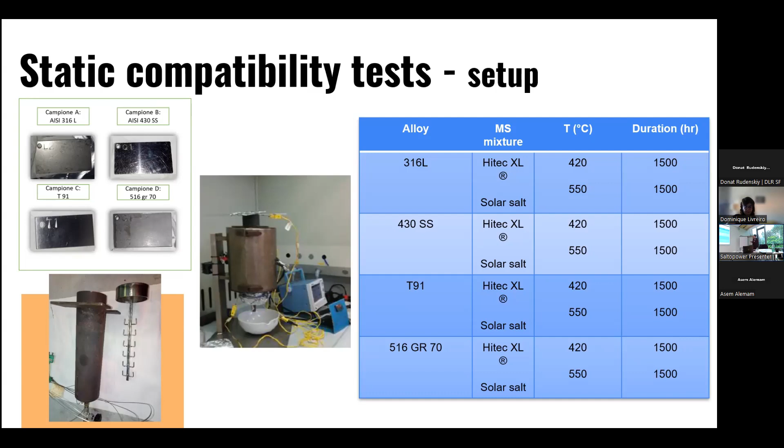We heated it up at different temperatures for this duration of time, and then we analyzed the salt mixture after the experimental campaign to check if there were metals or an excess of something that could damage the composition of the salt. Here are the pictures of the 4 steels we inserted, and the analysis before and after the static compatibility test. This first test was performed with Hitec XL at 420 degrees.

The corrosion mechanism is very difficult to explain in just a few minutes, but what we are looking at is the passive oxide layer that forms during the corrosion experimental campaign. As you can see, before and after, the layer is very compact and there are no damages or holes in this layer.

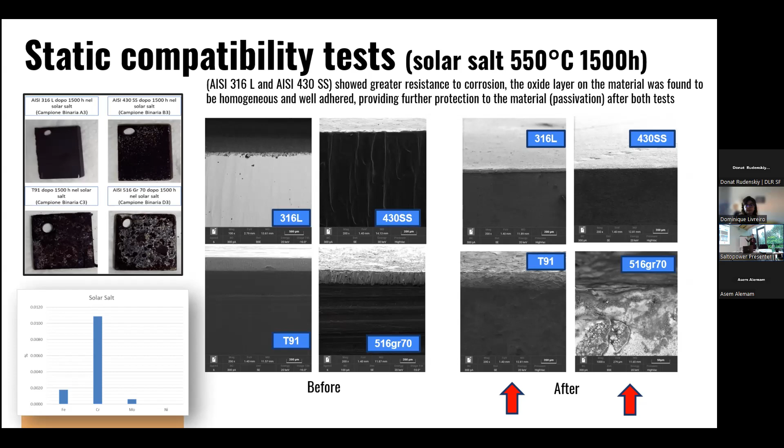So we can state that for now this test was okay. We performed the same test with the same kind of steels using solar salt at 550 degrees for the same amount of time. As you can see in the picture, when we picked up the steels and performed the analysis before and after, we have a lot of holes in the oxide layers. This states that especially the carbon steel cannot be used at very high temperatures.

So moreover, we moved on and decided to perform some dynamic compatibility tests using a facility that can contain 30 kilograms of salt.

This facility has a huge stirrer that simulates the flow of a real plant. We decided to test the same steels of our lab scale tests with Hitec XL and with solar salt at more or less the same temperatures.

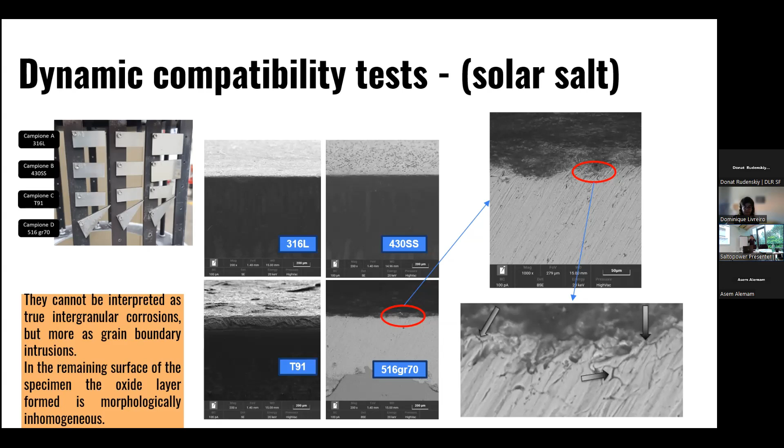But it is not so good for a steel like this, because the salt can go inside and crack the steel. The same applies regarding the solar salt test, at higher temperature. We can see some little holes that formed, which cannot be interpreted as intergranular corrosion, but more as grain boundary intrusion over time, which can lead to a huge crack on the oxide layer, allowing the salt to infiltrate inside the steel.

So these are some tests that are ongoing now in the MOSE facility. We decided to test the same steels at a higher TRL inside the MOSE facility. Here I reported the steels we chose and the temperatures we are going to use, simulating the cycling of temperature during an actual CSP plant.

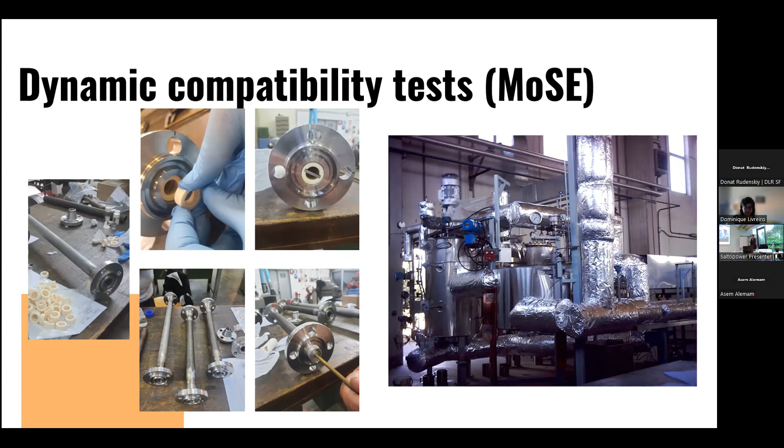We decided also to test the steel as is and the welded version, because we know the welded one could be more weak, especially near the welded line. I only have some pictures because the tests are still ongoing, but we created a dedicated setup in part of the MOSE facility where we inserted all the steels so they can be invested by the flow of the salt. We will see what happens after the experimental campaign.

Just a few words regarding the compatibility of molten salts with solid fillers. Within the Sfera 3 project, we collaborate with Evora on these activities, performing an experimental validation of a screening procedure that could be feasible to select promising ceramic fillers as storage materials. We considered two types of slags from industrial waste: the first, provided by Enea, made of aluminum silicates, and the other, provided by Evora, iron silicate slags.

We created a dedicated setup for this experimental campaign, and the methodology was decided according to the scientific literature. So the experimental test conditions, that is temperature and contact time, were decided within the project. Here I reported all the data for the first experimental campaign.

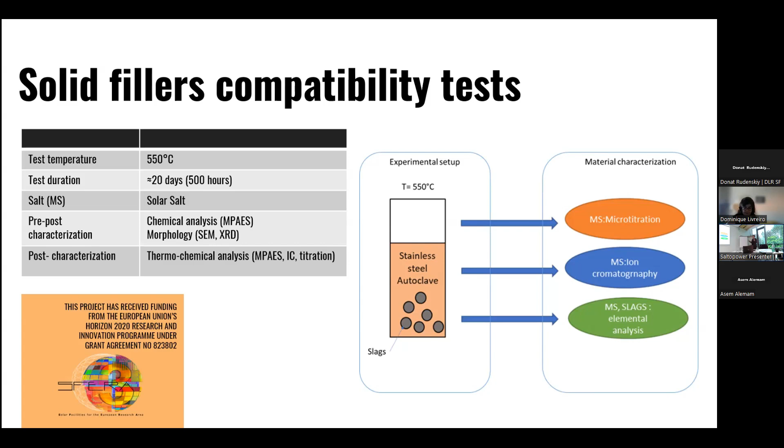After all the tests, we characterized all the materials. That means we characterized the salt before and after the test, and also the slags before and after the test. Here are the techniques used: microtitration, ion chromatography, and we also performed elemental analysis on the slags, just to see if they were affected by corrosion or similar phenomena.

The result overall concerning slag composition showed that Enea slags were stable enough to be used as storage materials. The same experimental campaign was conducted with Evora slags. Also in this case, there is the presence of nitrites in the solar salt after the experimental campaign, and formation of oxide, but in this case it's more or less negligible. Overall, the constancy of the iron weight percentage before and after confirms the stability of the Evora slags during the thermal compatibility test.

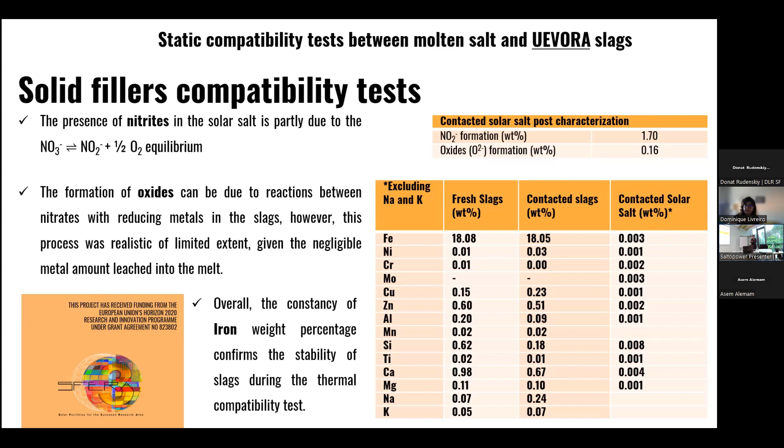So now we are collecting all this data, and maybe we would like to prepare another experimental campaign, maybe lasting longer than this one. We will collect all the data and put everything in our database, just to create, for the first time, maybe a tool that could be interactive for people working in this field. So for now, thanks for your attention. If you have any questions, I've put all the references here, but you are free to contact me, and we will discuss together.

Thanks a lot, Anna Chiara. Another very complex presentation about materials, about lab testing. Questions?

Thank you. I need to check the chat, there are comments, questions.

I have a question. I'm Maria Elena Gennaro from ENI. I was wondering if you planned to also assess material compatibility for stress corrosion cracking, since I think it is a topic that has not already been determined.